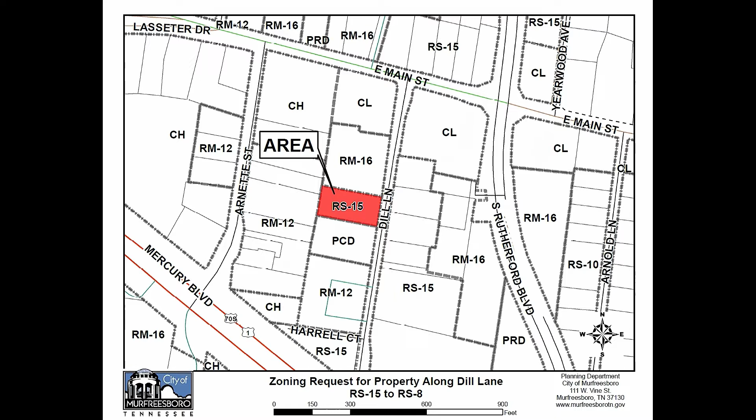The property is just under half an acre, and it is currently zoned RS-15, single-family residential district, with a minimum lot size of 15,000 square feet. Under the current zoning, they cannot create 2 separate lots. That's the impetus for the rezoning request, to go from a 15,000 square foot lot down to an 8,000 square foot lot. That's why their desire is to rezone it from RS-15 to RS-8.

You can see the surrounding zoning in this area. There's several different zoning districts. There's RM-12, which is multifamily residential district with a density of 12 dwelling units per acre. CH is commercial highway district. CL is local commercial district. And RM-16 is similar to RM-12, except it has a higher density. So as you can see, there's several different zoning districts within this area.

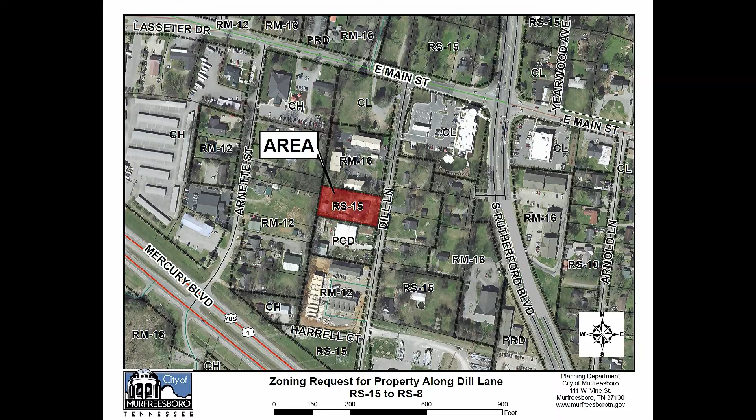Just to the south is a PCD, planned commercial district. The future land use map does recommend that this area develop auto-urban multifamily, and the use is not inconsistent with that future land use map, though the lots are smaller and it is not a multifamily use. But staff is still in support of creating single-family lots in this area instead of multifamily lots, because the lots are so small it would be difficult to do a well-designed multifamily development on a property that's a half acre. If you have any questions, I'll be glad to answer them.

There are representatives of the applicant here this evening. They have provided an exhibit in the packet to show you what the 2 lots might look like. It would be a traditional lot and a flag lot, and each of those lots would be able to meet those standards under the RS-8 zones. There'd be no need for a variance. Some of the information on the exhibit is just for your review, it's not for plat review. In the future, when they want to re-subdivide this property, it will have to come back before you for that approval. If you have any questions, I'll be glad to answer them.

Otherwise, you should conduct a public hearing prior to making your recommendation to City Council. Thank you. Does anybody have any questions for Ms. Green before the public hearing?

We will open the public hearing and ask anybody that would like to come forward to speak either for or against this item to please come forward, state your name and address at the podium, and make all your comments to the Planning Commission, please. Anybody at all? We will close the public hearing and ask if there are any other comments or questions from the Planning Commission.

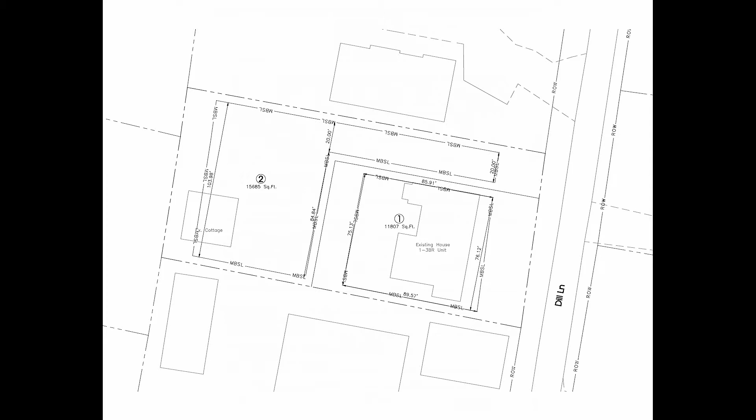The only reason I asked the question was it looks like it's wide enough for two long lots where they both have frontage, but based upon the width of the property, you need 30 feet for the flagpole portion and at least 55 feet for the non-flag lot. So for each flag lot, you would need an additional 30 feet. I don't believe they have enough frontage to be able to get a third lot there.

I especially agree, with the constraints of the existing home. I was just talking about the frontage, just having two lots, any two normal lots. I think the limiting factor is the existing house. You can see the footprint of the existing house. I think their goal is to leave the existing house up front. Okay, yeah, I got it, with the location of the existing house.

Thank you. I had a question too. Is the applicant here? I called you today. I did have a question, interested in talking about the services that Journey Home provides, who will be the clientele you're looking for here, and as we expand, more question for staff. I called somebody today just to ask about whether there have been any challenges on the site related to neighborly complaints about anything related to the site.

No, not since we've been there. If you don't mind, just go ahead and start out by introducing yourself for everybody watching tonight. Sure, I'm Scott Foster, director of the Journey Home. We operate a center at 308 West Castle Street here in town, and also have 25 homes and apartments that we rent to low-income families and individuals throughout the city. We acquired this property in 2014, and we've had three families, the family currently in the front house is our third family in those 6-something years.

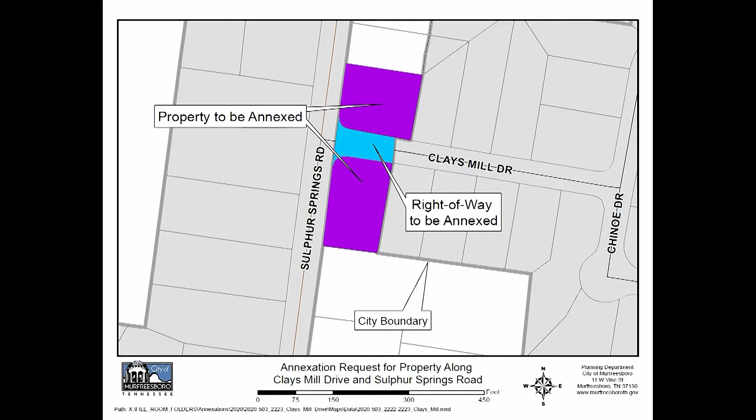So we studied the area. I have presented in your packet a plan of services and a feasibility study. What that does is provide a time frame for when the city can provide services and identifies the services the city can provide. Essentially, we're already providing many services to this area.

It's already receiving sewer and paying an outside-the-city sewer rate. If annexed, the rate would go down to the same rate that we pay for those of us who live in the city and have sewer currently. It currently receives water from CUD and will continue to do so.

These two lots are part of a larger subdivision, most of which is located in the city. These 4 or 5 parcels were left out when the subdivision was created so that we would not create an island of unincorporated area of Rutherford County. It was a way to have this development mostly be in the city, but to comply with the intent of any of our interpretations of the law.

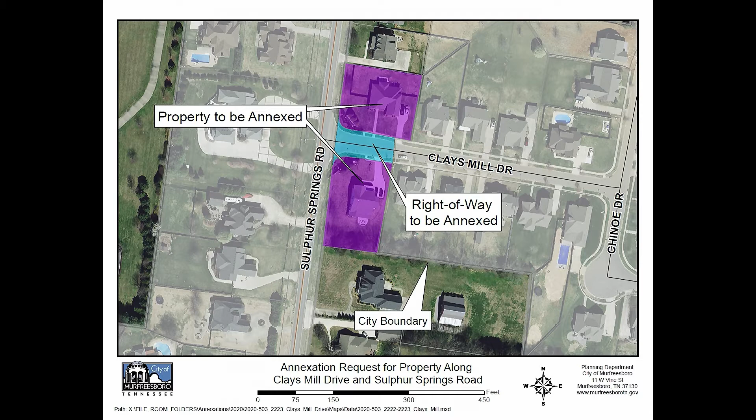Since then, we've had some changes in circumstances and legal opinions, and we believe that we can annex these properties and would be within our ability to do that. After conferring with our legal staff, they're comfortable with this annexation, if that's something the Planning Commission would like to recommend. The properties are contiguous with current city limits.

They are located in the urban growth boundary. The Rutherford County Road Board has considered the 150 feet of Clays Mill Drive that we're requesting to annex as well. All of Clays Mill Drive, except for this 150-foot portion, is already in the city limits, so it made sense that one entity would be responsible for the continued maintenance and operation of that road.

You may recall that Sulphur Springs Road is on our major transportation plan and will be improved in the future. When the developer created these lots, the developer did participate in those improvements by providing fees in lieu of construction to our office, so we do have funds from the developer for future improvements to that road when it does happen, but I thought you might want to be aware of that.

So this would be a relatively easy annexation for us to enact. When we studied this, we thought that just annexing property so they can go to city schools may not be reason enough, but after studying the property and seeing that it really probably would benefit our service providers and it would make sense, our recommendation as staff is that you consider approving this annexation, since they are receiving city services, drive city roads, and are part of a city subdivision, so it made sense to us to bring this to you.

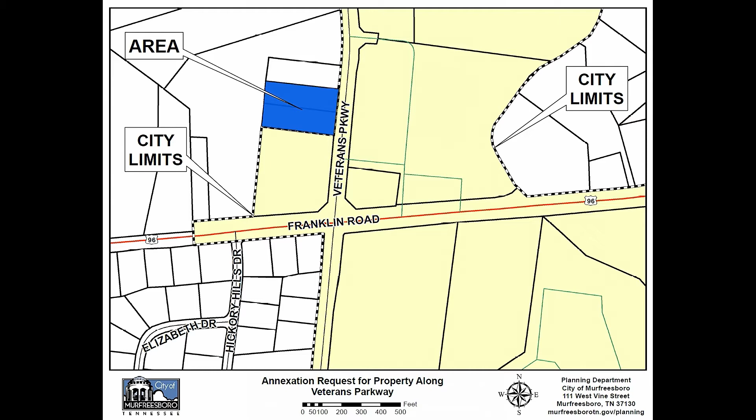As indicated, the subject property is located on the west side of Veterans Parkway, just north of Franklin Road. It does include 2 parcels, each approximately 1 acre in size, for a total annexation area of 2.12 acres. The property owners have filed petitions with the city requesting annexation. They also have submitted a simultaneous application to rezone the property to commercial highway.

This may be a little bit familiar. This was one of the 2 parcels that had come before the Planning Commission in 2019, almost a year to the date, requesting annexation and rezoning. After deliberation and public hearing, there were some comments provided back to the applicant to consider acquiring an additional parcel to make it a more buildable lot, which he has since done.

So the property, he does not own it yet, but it is under contract purchase at this time. The study area is within the urban growth boundary, and it is contiguous to the city limits on the south and to the east. We do have some concerns about these being currently developed with single-family residences that are occupied.

Our assistant city attorney has been in communication with the applicant about how to resolve some of this. We would like to see the parcels combined and those houses demolished before the zoning would take place. They are discussing possibly providing conditions on the annexation with an agreement that would require that to take place. Mr. Ives can describe that a little bit more in detail.

For tonight, the purposes are to open up the public hearing and deliberate, and then make a recommendation to the City Council. I'm here for any questions, as well as the applicant is here this evening, and the applicant's representative, Mr. Clyde Roundtree.

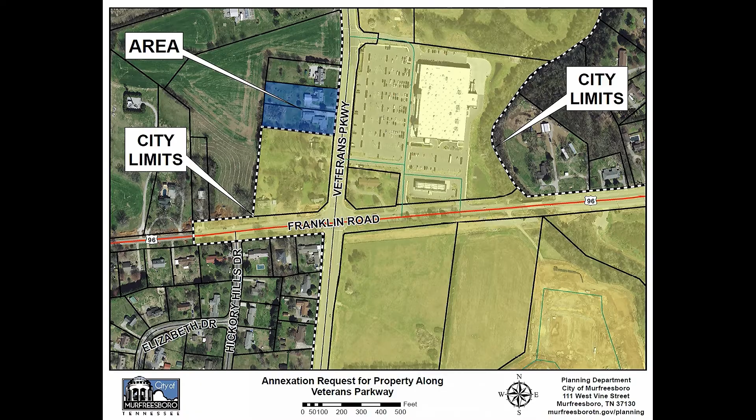Combined into one lot. One thing I would add that was brought up during the 2019 public hearing was regard to cross connectivity between the area shaded in blue and the Veterans Plaza corner. Since that time, the Veterans Plaza developers came back in, submitted revised plans and a revised plat, and now, as part of their approval, we do have the cross connectivity between the lots, so that people would be able to get from this development to Veterans Plaza without having to get back out on Veterans Parkway.

Correct. And I guess one question, presumably now we will only have one curb cut between those two parcels, which once they're united, can we talk about that? I would have to defer to the applicant and his representative. We don't have a site plan proposed for this. I think they've put together some concept drawings that they may be able to address that question.

Turn that over to Clyde. Mr. Roundtree, good evening. Yes, I'm behind this mask. Clyde Roundtree, Huddleston Steel Engineering. Thanks so much for hearing our request for annexation and rezoning.

Mr. Martin, to answer your question, we know we're going to have cross connectivity. Exactly where the driveway is going to show up, it hasn't quite been determined yet, but it more than likely won't split these two lots. What we're running into is one more lot over, which is currently for sale.

There's a stoplight right there. And so how that all lays out ultimately, I have a feeling there'll be cross connectivity against all three lots going to the traffic signal. So more likely between the three lots will be one driveway, whether that splits our property or shares with an adjacent property, that'd be the question mark. So it hadn't been determined yet.

But the goal is to limit the amount of driveways on Veterans, obviously. That's what we're shooting for. Also, several concepts that I've worked on have a lot to do with the back portion of the property too. There's a large acreage behind this piece of property, so we're planning on having some sort of rear connectivity as well that'll go onto Franklin Road.

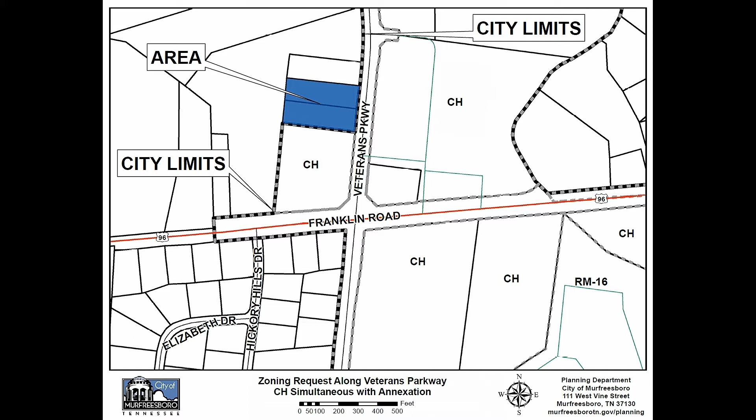Thank you - yes, this is the companion zoning application that accompanies the annexation item we just discussed and acted on. The addresses are 4431 and 4441 Veterans Parkway, located north of Franklin Road. As indicated, these are both currently developed with single-family residences and are no longer occupied - I need to correct that for the record. And as indicated before, they wish to ultimately combine the lots and develop it with commercial use for a liquor store. They've also mentioned a drive-through restaurant at one point to be added to the liquor store.

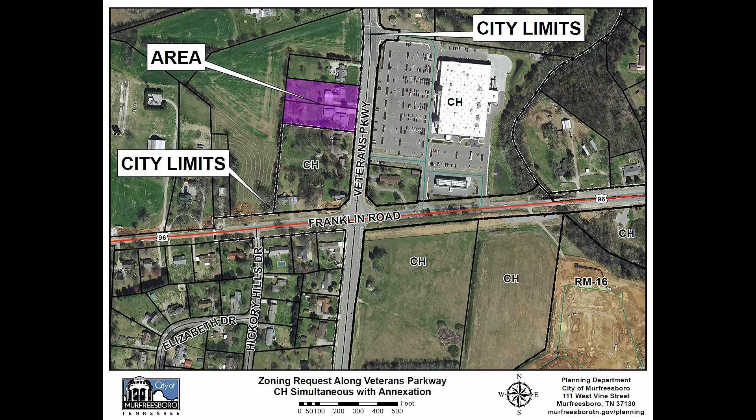The adjacent zoning is commercial services, in the unincorporated portion for one of the parcels. The other parcel to the north, the subject property, is currently zoned RM, medium-density single-family residential. Properties to the south are CH within the city limits, commercial highway. Property to the east is also in the city limits and currently zoned commercial, with the grocery store on the corner. Property to the north is still in the unincorporated portion of Rutherford County and also has single-family homes occupied, zoned RM.

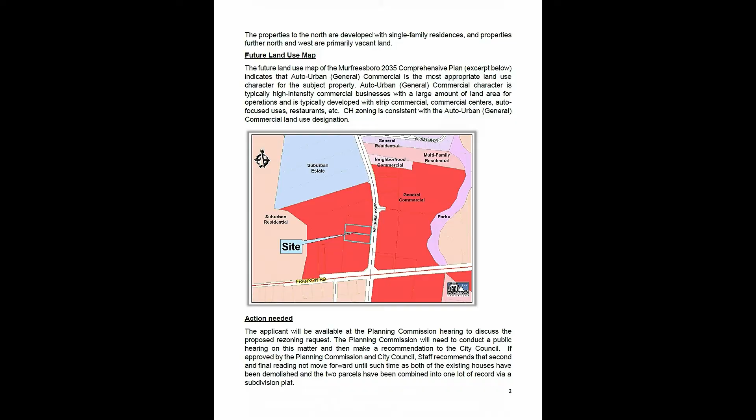The future land use map for this property in the Murfreesboro 2035 Comprehensive Plan identifies general commercial as the appropriate land use. Future zoning of CH is consistent with that land use designation, so there are no inconsistencies. Again, the action we are requesting is that you open a public hearing and then make a recommendation to the City Council.

Thank you, Ms. Rush. Any questions before we open the public hearing?

We'll open this public hearing and ask if anybody would like to come forward to speak. Seeing none, we will close the public hearing.

We'll ask for any other questions or comments from the Planning Commission and/or a motion. Does this motion need to include the same stipulation? Not necessarily. I'll make a motion that we approve subject to staff comments. Second. Motion and a second. All in favor, please state aye. Aye. Any opposed? Okay.

Thank you all. Next, we have a zoning application to amend the PRD zoning, Laurelstone PRD, on approximately 46.5 acres located along Lascassas Pike and Dejarnette Lane. Goodall Homes LLC is the applicant.

Our next public hearing, as you mentioned, is to amend an existing PRD, Planned Residential District zone. This PRD was created in 2017 and is referred to as the Laurelstone PRD, consisting entirely of residential development. You can see the area shaded in red on the map before you. It's a rather large parcel at 46.5 acres, with frontage along and access to Cushing Avenue and Lascassas Pike, and a couple stub streets, or at least one stub street into the property, Oakview Drive.

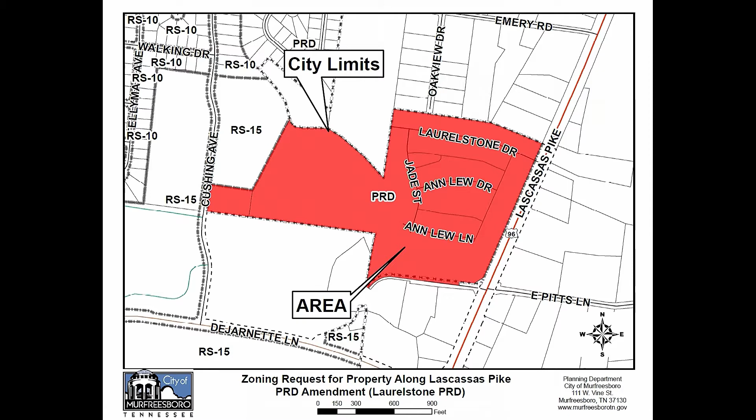The property is mostly surrounded by unincorporated area of Rutherford County. To the south is a church and some large lot subdivisions. Lascassas Pike, of course, has some ex-urban sized lots, so rather large lots.

The 2017 plan included townhomes and zero lot line type development only in the plan. It is 199 dwelling units with two housing styles they called cottages and villas. There were 149 cottage units, basically townhomes, in pods or buildings of 3 units, and the remaining 50 were villa units, the zero lot line homes.

They're requesting that the standards applying to those remain the same. However, after they began developing this property, the applicant, Goodall Homes, decided there was a need for a different type of product, so they're wanting to introduce a third ownership style in this development, proposing to introduce a small lot subdivision, or single-family detached.

The current plan approved in 2017 has 199 dwelling units for a density of 4.28 dwelling units per acre. This amended plan will ultimately reduce that number by just a few, from 199 units to 186 dwelling units, for a density that's just at 4 dwelling units per acre.

So what they're asking, as I mentioned, is to add or introduce a new housing style by adding 31 single-family detached lots, on small lots, most of them along Lascassas Pike, which makes sense because along Lascassas Pike you have a lot of large lot homes, and it makes sense to put the less dense housing style in that area.

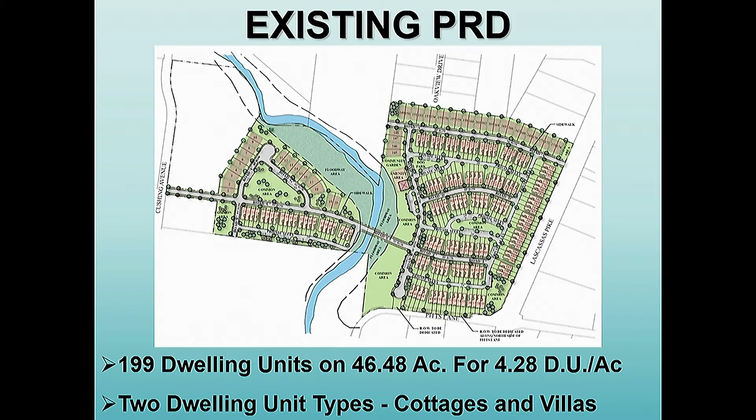We're here tonight requesting an amendment to the PRD, as Margaret Ann talked about, in regards to Laurelstone. You can see the original plan here, we had 2 housing styles, the townhomes and the villas. The villas are the zero lot line front entry garage homes. The cottages, as we call them, were the townhome style with rear access garages off private alleyways on that side. Originally had 199 units for 4.28 units per acre.

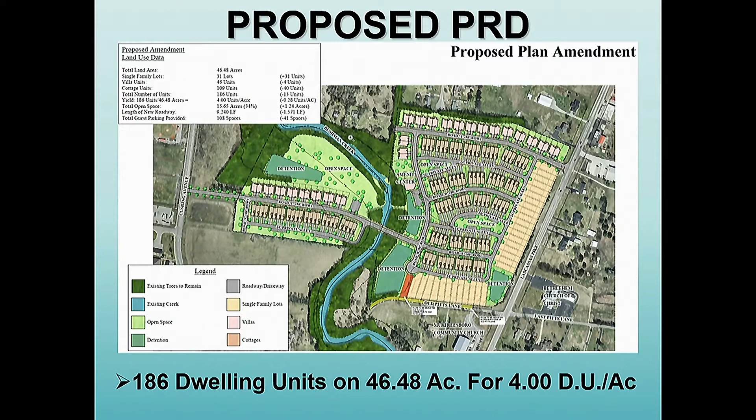The plan that we're bringing forth tonight has a change to that. We're bringing down 13 units overall on our density, so our density comes down to 4 units to the acre. You can see the plan on the eastern side of Bushman Creek is pretty much the same, except for the inclusion of the single-family lots that you can see.

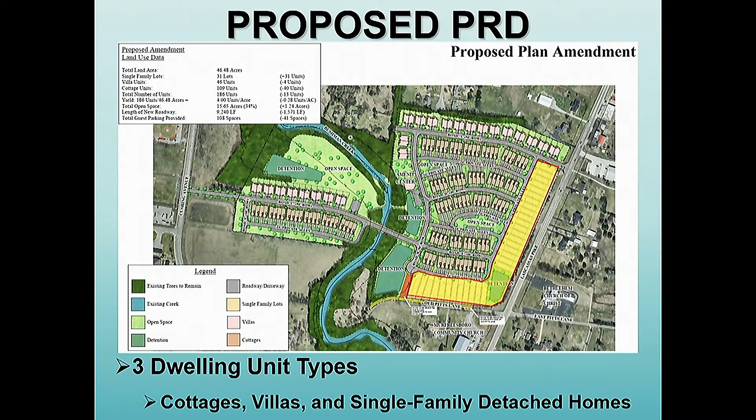So when we're talking about the 3 dwelling styles, again, the cottages are relatively in the same place as the original plan in the core. You had the villas along the external portions and the northern boundaries of the property. And now we've got the inclusion of new single-family detached homes that replace the townhome units that faced out onto Old Pitts Lane and Lascassas on that side. So that's where we're looking for the major change.

Cottages, as we talked about, have very tight front setbacks, and in regards to that, we have a very deep backyard. In regards to the driveways, we have 2 cars in the driveway and 2 cars in the garage to meet our 4-car minimum on that side.

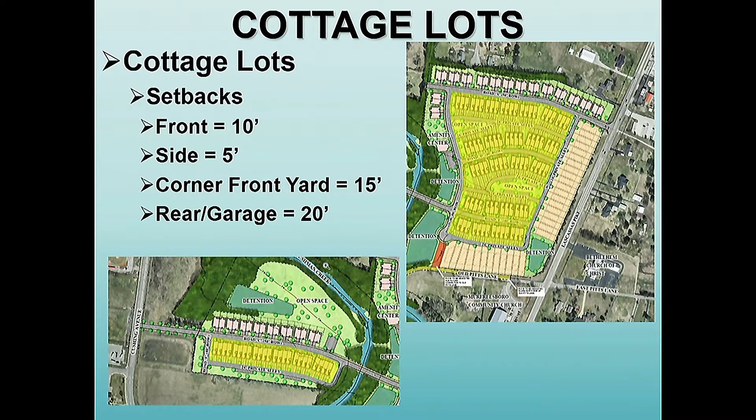Again, we're down to 109 of these age-targeted but not age-restricted homes. The minimum is 1,200 square feet. This is all similar to what we had approved 3.5 years ago on that side, so this is more or less the carryover. And these are what the rear alley garages look like.

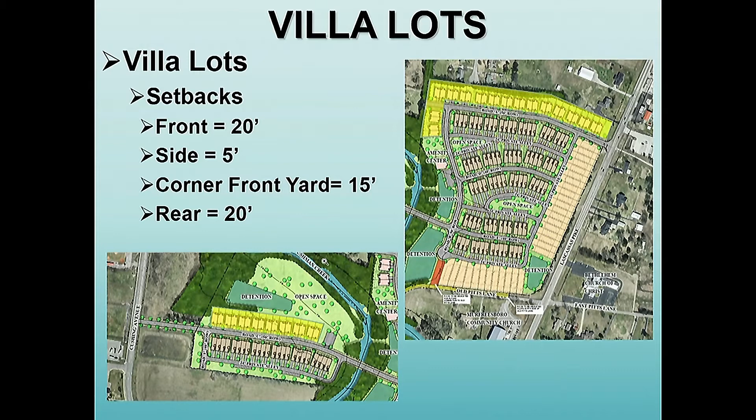The villas are a secondary component that was part of the originally approved plan. These are front entry garages, so you have room for 2 cars in front of the garage and then 2-car garages for each unit on that side.

If you remember these units, these are the elevations on that side. These are age targeted, but not age restricted. Our square footages go up to 1,400 square feet for minimum living area on that side, and like I said, these are all front entry garage.

Going back to the new product line, the single-family detached homes, you can see these have a 40-foot front setback to Old Pitts Lane and Lascassas. This is a carryover from the original PRD on that side, so the new product line in regards to the homes matches the same setbacks we had in regards to the townhomes that were on those properties originally.

So more or less all we're doing is displacing townhome units or multifamily type units with single-family detached homes along here, which, as Margaret Ann talked about, will probably present a lot better in regards to the residential style of homes on those larger lots out in this area. So something different to add to the product mix.

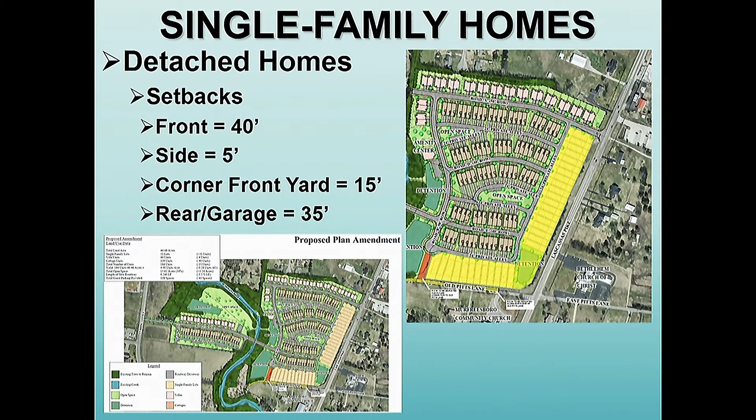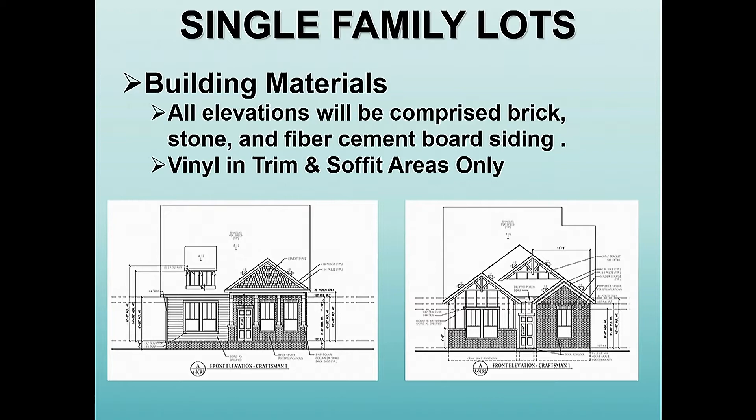You can see some of the elevations in regards to the character of these homes and lots, and some of the other architectural characteristics with regards to the water tables and such with the masonry board on that side, and the side elevations as well.

So Rob, can I ask you a question? Yeah. What's the front of the houses that are going to be on Lascassas? Which way are they facing? Does that make any sense?

The fronts of the homes actually face the road, so these are actually rear-loaded type products on that side. So there are no garages facing out to the main roadways in this. This is all rear alley on that side.

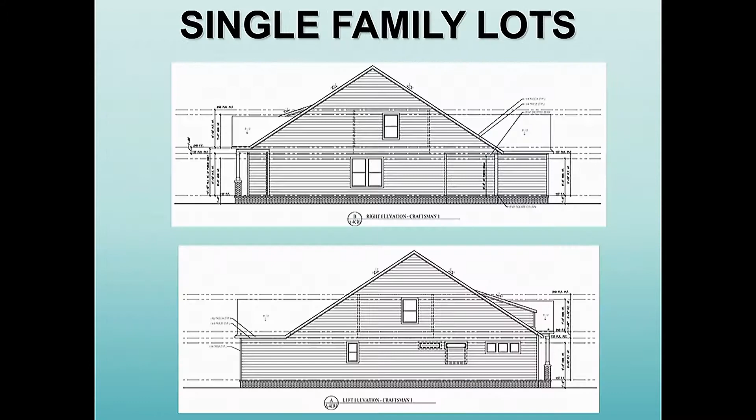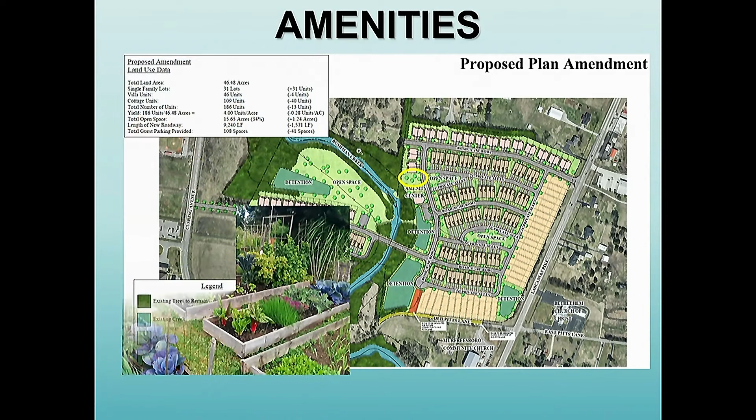Amenities, we've got the main amenity, and this is still the same program as we had with the original plan. The amenity with the clubhouse is the same focal feature. Aside with that, we've got community gardens and a pet park as well on that side.

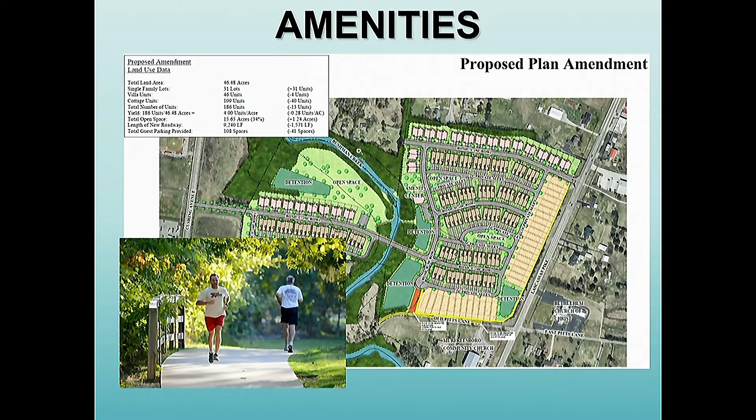Staying with our commitment from the original plan, we were going to install a 6-foot wide pedestrian walkway along the fronts of these lots. Since we don't have sidewalks on Lascassas and Old Pitts, we wanted to incorporate a sidewalk component to the fronts of these homes with our large setbacks, to allow for our residents a walking space that's safe and convenient, but also create a walking or running loop within the development itself, utilizing that frontage along those 2 roadways.

Access: the main access point we have is off of Lascassas. We actually have approved plans through TDOT for our turn lanes that we were committed to during the original approval. We have plans approved for a dedicated left-hand turn lane as you're leaving town to turn into the development, and also a dedicated right-hand turn lane to turn into the development as you're heading into town on Lascassas. Of course, our secondary access point will be off of Cushing Avenue once we get the bridge installed.

We've got two future stub locations that are pretty much in the same location as the original plan from 3.5 years ago, one to the north and one to the south, to allow for access to adjacent properties if those ever develop. We've also continued our commitment to leave right-of-way dedication for a future possible connection back to Old Pitts Lane, if the city ever needs to make that connection. So that's still part of our commitments today.

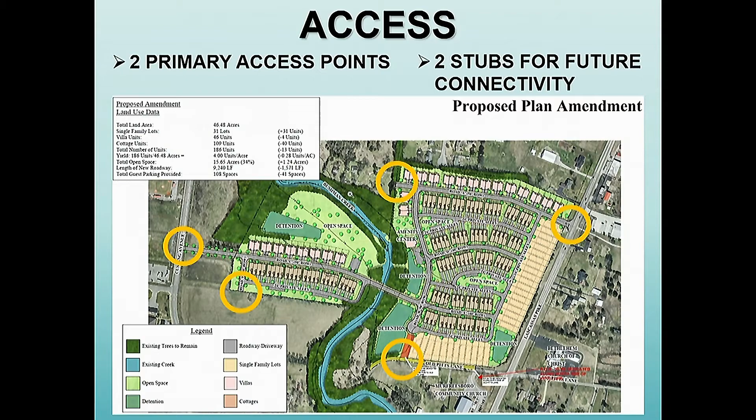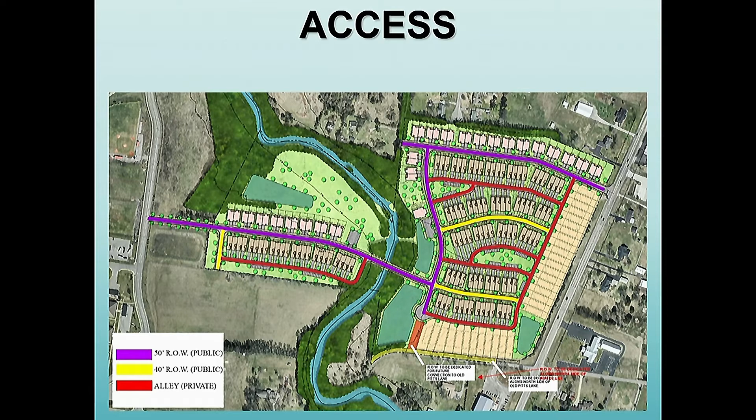As for access on our roadways, the purple is our 50-foot public right-of-way, the main thoroughfare through the development connecting Cushing Avenue back out to Lascassas. The yellow is the 40-foot local roadways for the streets on that side, and the red are the alleyways for all the alley garages in the development.

I appreciate your time and consideration. If you have any questions for me now, I'm here. If not, you can ask after the public hearing.

Can you remind me, our main access road off of Lascassas, will that be the initial only way in and out of this subdivision until phase 2 is done? How many homes will we have in that first area? Do we have a light at that intersection, or does that justify one?

As of right now, based on discussions we had at TDOT getting our plans approved, there's no light plan for that intersection. I don't think it warrants it given the amount of traffic on Lascassas. I don't know the specifics of what the engineering department worked out with TDOT, since that's a state roadway, but as far as I know, it's not warranted for a traffic light.

Regarding the amount of homes coming out that entrance until the bridge is built, phase 1 has a cap the city requested—about 50% of the overall density is in phase 1, which would come out that entrance until the bridge is made for the connection back to Cushing. It's the same commitment we had 3.5 years ago; we're just still honoring that.

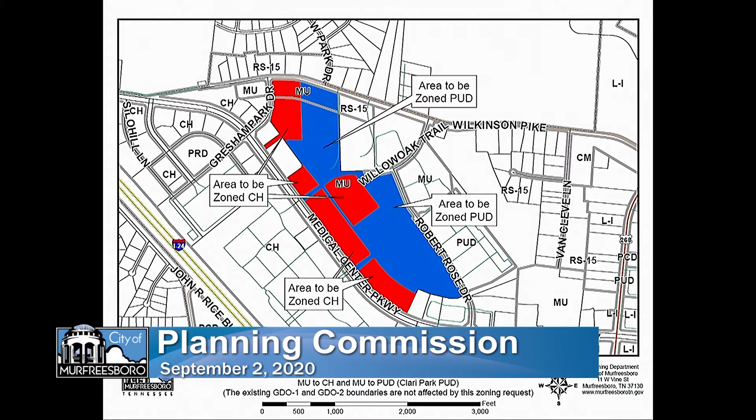As I mentioned, it would remain in the Gateway Design Overlay District. By being a bulk zone of CH, the plan development doesn't need to be very specific about the development of those parcels. I think part of their concern was they could do a plan, but things would likely change and they'd need to come back for an amendment. So given the option, they changed their application to CH, Commercial Highway District.

You can see it consists of several of those areas identified in the pattern book. On August 19th, we brought it back to you and asked you to amend when you scheduled for a public hearing, to include the CH portion. So that's what is on the table tonight.

As far as the plan, even though there are two different zoning districts, it's really important to staff that it be managed and maintained with an overall responsible entity, and that it maintains the standards. Across the street, the Avenues is not a planned development, but they have very strong covenants and an architect on board that reviews all developments and tenant build-outs, with a strong management regime. So we've asked them to come up with a plan for this, because we fully expect that portions of this will be sold off and won't all remain under the ownership of the applicant, who is Hines Development tonight.

So when you do sell property, I want to make sure the intentions are communicated and those off-site improvements are included. Some elements of the CH property are included in the plan development book, addressing the streetscapes along Medical Center Parkway and some roadway extensions. So it does speak to the CH portion, and I expect, before City Council's second reading if this gets there, any needed restrictive covenants can be adopted.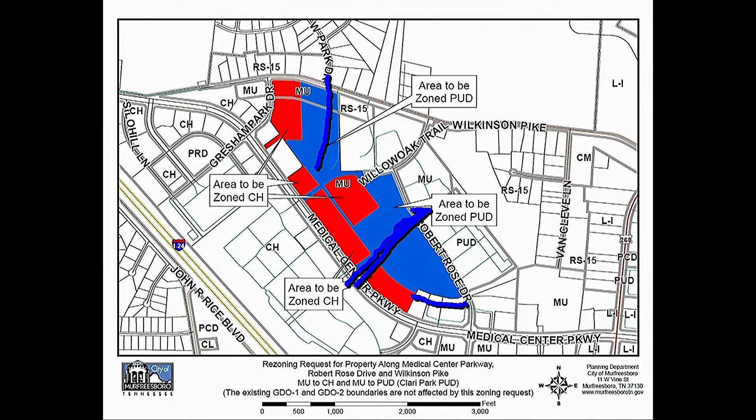I never know how to undo these. Matthew always helps me. I'll just leave them up there. Bottom left-hand corner, it says undo. There we go. Okay.

So as far as the townhomes, I guess I can bring up some exhibits. I did include some communication from the applicants saying what has changed, because it's been an iterative process with so much back and forth, and I'd like to document what's being changed and have something to reference.

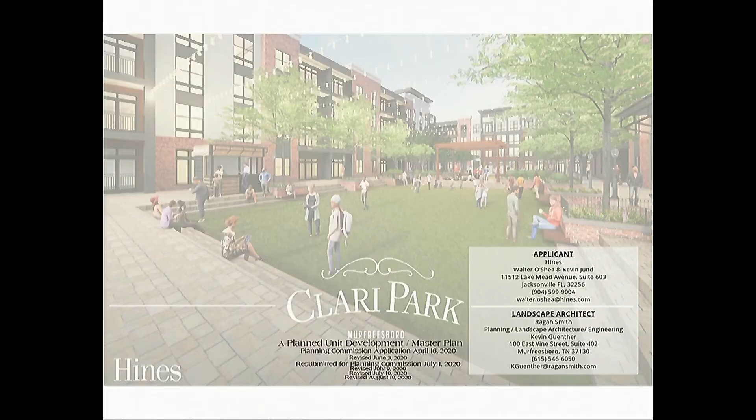So what I'm providing comments on are the version of plans that were provided to us to include in the packet tonight. I know they've sent some emails today and last night wanting to make some further changes, and we can talk about that later, but really the comments relate to the plans we have available to us and the ones you have on your iPads.

I did want to mention we were concerned about the timing of some of the road connections. We really wanted to see Willow Oak tie-in sooner than what was shown in the previous plans. They have a sheet in their pattern book - sheet 26, which gives specifics as to project timing. To their point, they wanted to have some time to build the infrastructure and have some cash flow to complete the work.

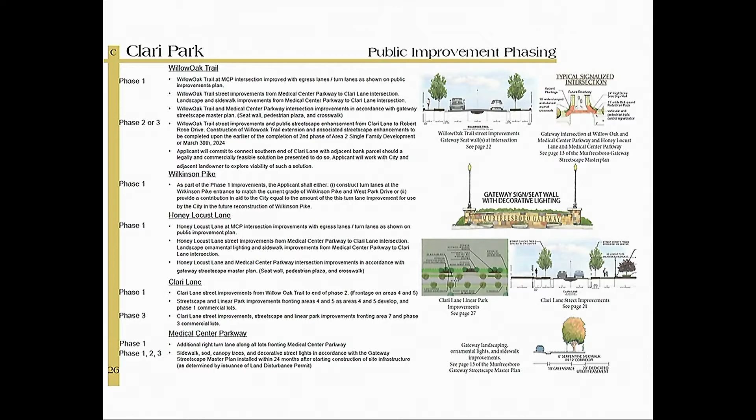So I was asking for Willow Oak to be completed in an earlier phase. They've broken out some of the development so it will start earlier than previously proposed, but it probably won't be finished until later. So I do want you to pay attention to sheet 26, which specifies the public improvements phasing, something we talked about in previous versions of the plan.

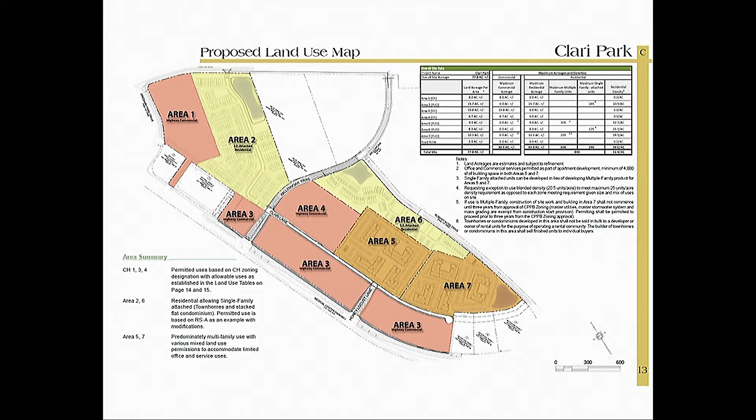So there's a land use map that gives the acreage and the number of dwelling units for each acreage and the anticipated build-out. As I mentioned, the townhomes were the portion that I had the most concerns with.

In the Gateway, of course, it's an area we're really proud of, a city that has continually invested in it. It's something we envisioned years ago and are proud of how it turns out. So when we review developments in this area, we expect more than you might see on the other side of the interstate or on one of our major arterials, but it needs to be different. It needs to be special. It needs to be more than just temporary housing - not temporary as in homeless, but just a place for people to live for a while until they can really live somewhere they want to.

So when I've been reviewing this application, there's a higher standard that applies here than I might apply to some other areas, because of the investment we have in this area and our expectations for it. And so there are some elements of this plan that I mentioned have changed, but were big concerns of staff.

One was that the plan created a lot of dead-end drives or roads. This version shows some hammerheads where you could turn around, but they're not interconnected. We're constantly asking the Planning Commission, even in the face of people who may not want it, to provide interconnectivity between developments and within developments. So we were concerned that they were creating so many dead-end streets that are basically traps. We didn't want service providers to have to back out, and we didn't want people who live there to have to back out of these developments.

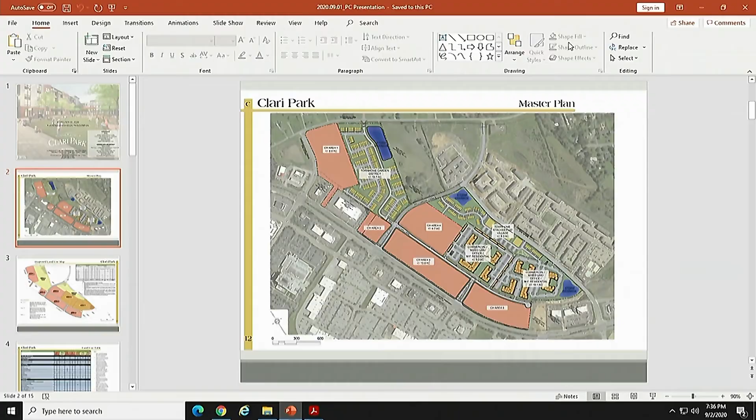The next page I want to reference is page 13. You'll see what we have here is the land use areas. Once again, this map has not changed as far as acreages or road networks or things previously proposed from what you saw before. What has changed is that we have designated those orange areas as commercial highway, and we still have 3 distinct types of use, mixed uses going on with our land use areas. And the densities that were proposed as we last were before you have not changed. The overall unit counts proposed, multifamily and single family attached, have not changed since we saw you last.

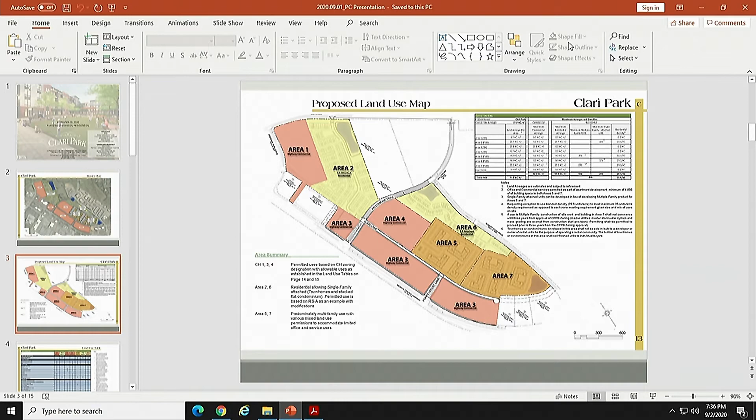So the next 2 pages I'm referencing are pages 14 and 15. The reason I want to reference these pages goes back to what is permitted on all these different areas, 1 through 7. I believe we've come to a point that we've gone through each and every one of those uses with staff, and we're in agreement, and I believe they're in agreement. These are the types of uses that work in the gateway. We wanted to eliminate anything that was not a use that might be permitted, say, in a commercial highway district, but not work in our master plan.

So we've carefully crafted this list with feedback from the staff, and we have made all the revisions they requested us to make on those land uses. We think that's very important because, as Margaret Ann had mentioned, this is not just a typical commercial highway property.

The next page I'd like to reference is page 17, and this is the requested exceptions that we made on the project. Really, the only reason I want to highlight this page is, once again, to go back to the understanding that these exceptions have been reviewed with staff. We believe they're comfortable with these exceptions, and we want to make it clear that we are not asking for a different approach to the percentage of multifamily. What we are asking for is a change from part of the master plan from PUD to CH zone, but the overall acreages, the overall exceptions and land uses have not changed. We'd be glad to review any specifics of those land uses with staff or planning commission.

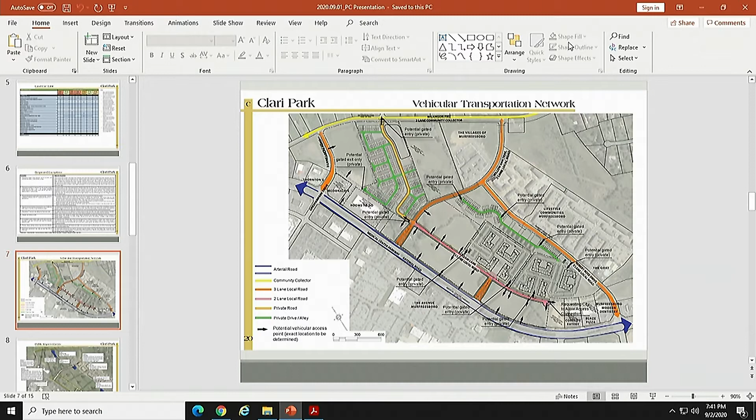The next page I'll reference is page 26 in your booklet. Once again, we want to make clear that we've provided a very specific phasing sequence for all the public improvements related to this project, and staff has agreed that this sequence makes sense and gives the city what's needed as far as the phasing we show.

One thing mentioned was the importance of Clari Lane. In the center of the project, Clari Lane is extended over to the far right lower part of your page, which would be the southeast corner of the project. Margaret Ann mentioned a connection from that point over to Robert Rose Drive. We are in full agreement with allowing that connection to happen, and we've provided the connection point needed from our property. We've also provided a turnaround cul-de-sac in case that connection doesn't happen.

I want to make it clear that we are all for the connection. We would love to see it happen, and we've given all the tools we can on our property to make it possible. But as far as the rest of that connection, that would have to be worked out between the adjoining property owner and the city. So we've tried to provide the proper geometry and connection points for either scenario. We would love to see the connection happen, but if it can't, we understand there needs to be a proper turnaround designed to meet city standards. We're going to provide both of those options.

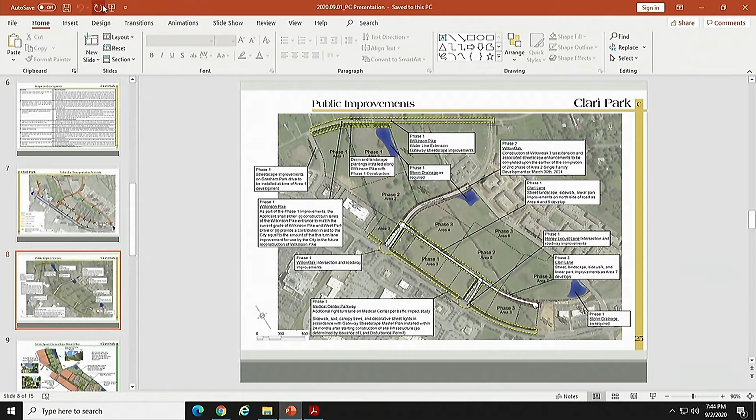Go ahead and put this in presentation mode. Oh, we lost it all.

There we go. Wes McGill with Reagan Smith, the civil engineer representing the project. Like Kevin mentioned, we did hear some concerns from the adjoining property owners about some existing drainage problems along Wilkinson Pike, and we want to walk through with the Planning Commission our plans to address those.

On-site, what we can do is provide stormwater ponds, retention ponds, or detention ponds to manage our on-site stormwater, making sure our runoff rate is less than what it is today currently. So we're going to manage that on our site. And the construction of the landscape buffer berm along Wilkinson Pike will also help manage that water and hold it on our site.

We'll release this pond into the roadside ditch that goes down Wilkinson Pike.

We did learn by reviewing the 2010 flood aerials that they were great at showing what the issues are during larger storm events, and the overall basin in this area culminates down to a low point. It's in the Hale property adjacent to Clari Park, and in its existing condition that gets dammed up and wouldn't allow water to escape. So essentially all that water, the only route for it to go is to cross Wilkinson Pike and then over into the Manson Retreat subdivision.

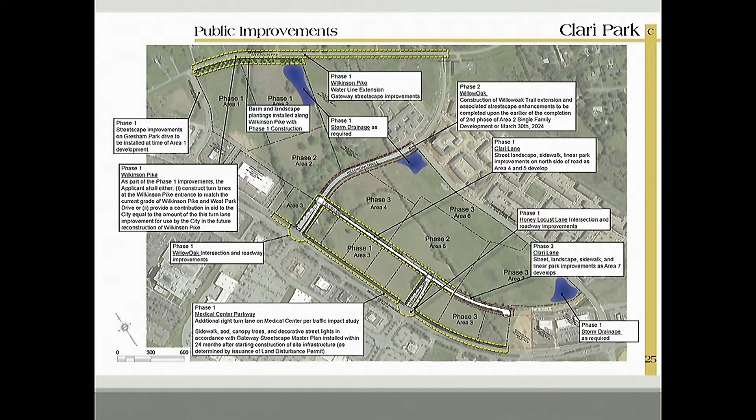If you have any questions about stormwater, I'd be happy to answer them. If not, I can turn it back over to Mr. Gunther. Any questions on stormwater? Okay, alright, thank you. Thank you very much, appreciate it, Mr. McGill.

Thank you, Wes. And I think one of the things we're just trying to really point out is that we realize this project impacts the surrounding area. Wilkinson Pike is part of this project, we realize that. Hines Development has said we want to help the city improve not just what's happening on our property, but what's happening with the storm drainage that we heard was a concern from those adjoining residents. We'll continue to work with staff, we'll continue to make sure whatever's designed is appropriate. But that is an idea that the Hines Development team wanted to come up with and present to you tonight as something we realize is important.

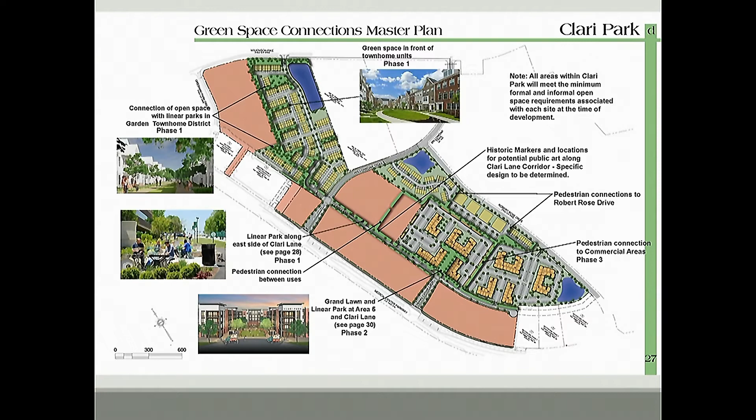Alright, the next page we'll take a look at is page 35, and I think it's worth spending a little bit of time on this.

As Margaret Ann had mentioned, we have made revisions to the site plan included in this current document, but this was our starting point. I want to point out the things we've done in response to staff, because we think their comments were important and valid, and we have continued to craft this, even since Friday when we received those comments.

So what you see is that we've reoriented a lot of these units along that main driveway, the main drive that comes through the project. That's something we recognize is going to make a big difference in the way it feels as you're coming down the primary street.

So we've accommodated that, and in places where you cannot have the front facing the street, that is where, as Ms. Green mentioned, we are working on very specific details of a wraparound porch. That would be relative to these units facing along the drive, the units facing the perimeter of the site adjacent to other properties, and units where that side of the building faces our primary street. We've recognized those side elevations have to be something special.

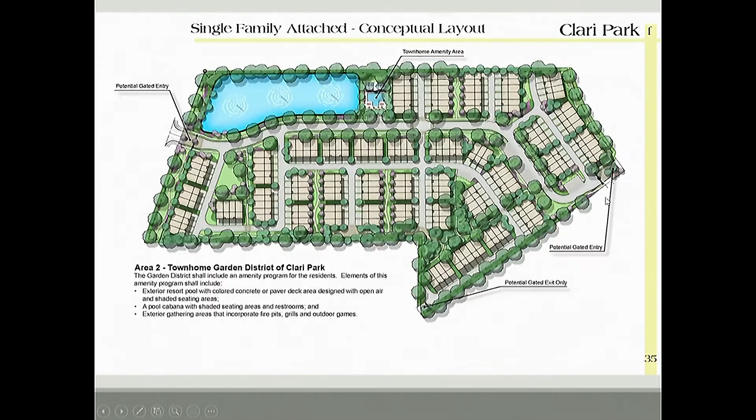We know that's an important thing, so that's something else we've agreed to. As you see on this page, the far left image in the middle depicts part of what we see for that wraparound porch and how that starts to treat the edge of the house as something different than just a side elevation.

The middle elevation is a good example of what the rears of these buildings would look like, and you can see there again, we don't feel like just because it's in the rear, it's devoid of detail. It still has a high level of detail, still provides some personal scale to that building. We really think that this is going to be a top-notch product and a top-notch architectural style, something that'll bring really a new level to single-family attached, not only to the Gateway but to the city of Murfreesboro.

The other thing we've done is, as you see, there's the Southern traditional, the farmhouse, the craftsman styles. They're unified in some of their materials and how they feel and the scale, but we want variety, we want interest as well as unity. So we're working hard at making sure that you're not going to have a row of the same type of architectural styles. There'll be some variations and there'll be some interest and nuance along with the unity.

So I know this has been something that's important. I'm happy to pause here if there are specific questions. In your pattern books, you will see some enlargements. If you go to pages 39 through 41, we show the same images but just at a larger scale, so it might be a little bit easier for you to read. But on page 37 here, we summarized all of those elevations onto one page, so you can compare the different styles.

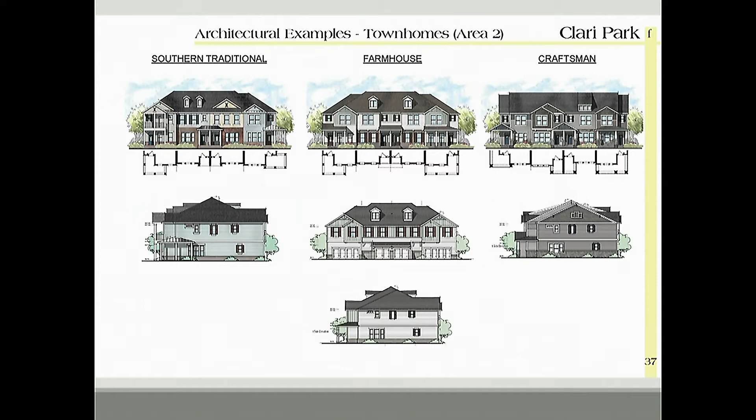So, two questions. Yes, Mr. Halpern. I just want to make sure I understand. On page 38, it outlines what is going to be considered enhanced side with wrap porch and enhanced side elevation. So these are the units that you are—is this being amended also, or? Yes, sir. That image is also being amended because this is based on our old site plan.

So we provided Ms. Green and city staff with a revision to this that communicates directly to the new site plan we have. And there's no reflection—please correct me if I'm wrong—there's no reflection of the wraparound porches that you are speaking of that I see in this?

In the pattern book, a good example, if you go to page 40, you see that Southern traditional style home, and the image on the bottom of that page shows where that wraparound porch is detailed around the corner of the home. That would be an example. If you look at that same page, the top elevation, you'll see how that wraparound porch from the front elevation fits in and then extends past the side elevation of the house.

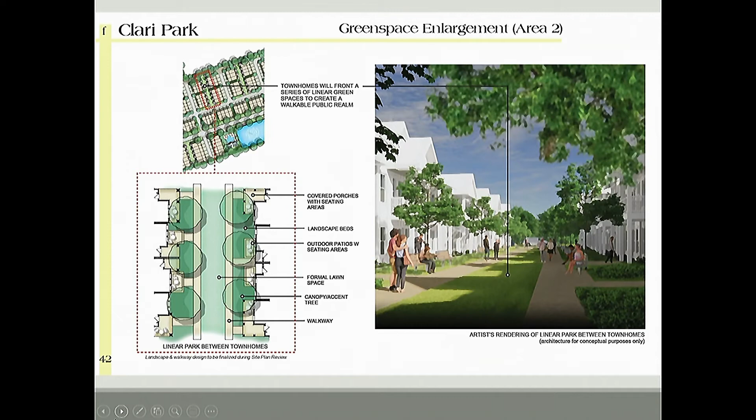Next page I'll refer to is page 42. This really hasn't changed since the last time we were before you. We just think it's really important to show how no matter what kind of layout we have in area 2, we're still committed to the mews, or the common greens between the front of the units, and how that still fits within our current site plan. This illustrative is showing how that space would feel.

So we just wanted to commit that that hasn't gone away with the change in our site layout. Same thing for page 43. With the site layout change, we wanted to demonstrate that we're looking very hard at where the parking fits, where the sidewalks fit, everything to the HVAC locations. Where you see the little box into the units is actually where the HVAC unit is worked into the recess of the facade, so some of those are very well hidden. We've been working very closely with the requirements we know we're going to need for electrical, storm drainage, and all the other utility connections, just to make sure that it fits. We want to make sure it can be built, and we're committed to doing that.

So Kevin, back to page 42. Yes. And Margaret Ann, is this where you were talking about the fact that there's no front porches and no place for people to hang out, because in the back it's garages and all that kind of stuff?

That's right. I think probably page 43 shows a little bit more what the backs are, and that really is just alley, parking spaces, and utility structures. And so the area in between becomes their extension of livable space.

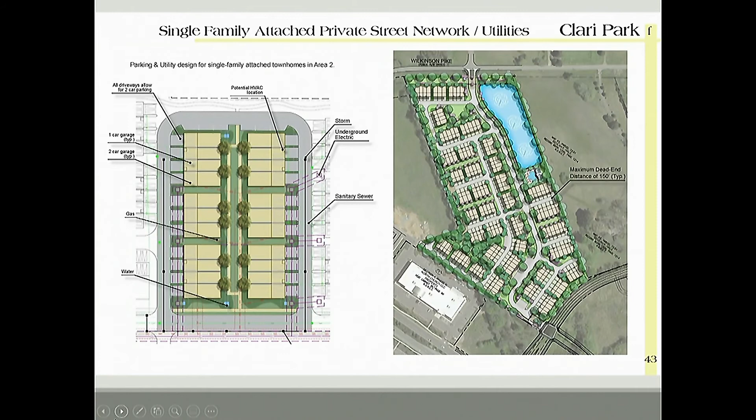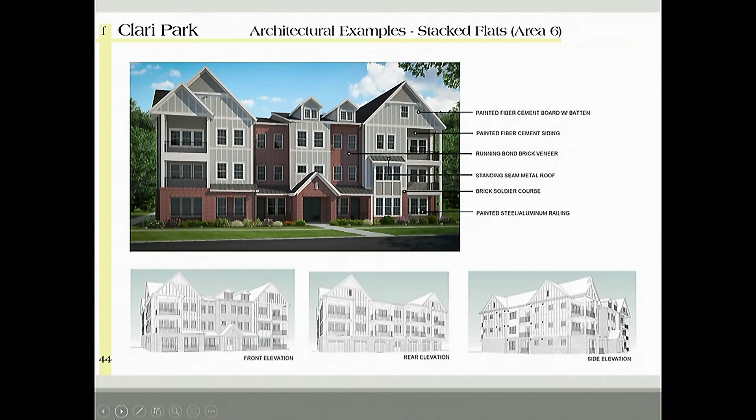The last couple pages I'll refer to are page 44, for Area 6, the stacked flats. I'm highlighting this to show that with our revised changes to the master plan regarding commercial and other things, this has not changed. It's the same as in your previous book and the same architecture we've committed to in the past. Likewise, on pages 46 and 47, relating to the multifamily, the architecture and amenities have not changed from the previous pattern book, and we feel it's important to commit to the design we're showing for the multifamily.

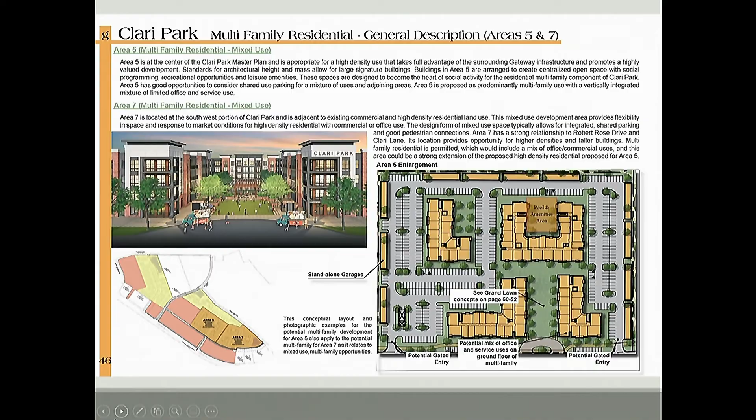I appreciate the opportunity to walk through all this with you. I know it's a lot, but as we said, this is very important, and we want to make sure to answer all your questions. We'd hope that after the public hearing, if there are additional questions, we're available for those as well.

So I have one for you. I think I heard, maybe in Margaret Ann's presentation, that the multifamily might have commercial at the bottom. Is that a correct statement or no?

That is correct. If you look at page 50 in your pattern book, you will see where that occurs on the site plan. The idea, as we mentioned, is that Clari Lane is really this place of commerce and open space and activity. We recognize that fronting the office towards that portion of the site as you first come in would be a very appropriate place to do it. So those two corners of the buildings in Area 5 are committed to a minimum of 4,000 square feet of commercial office, and there's an image showing how that would work into the architecture, how they could fit at street level.

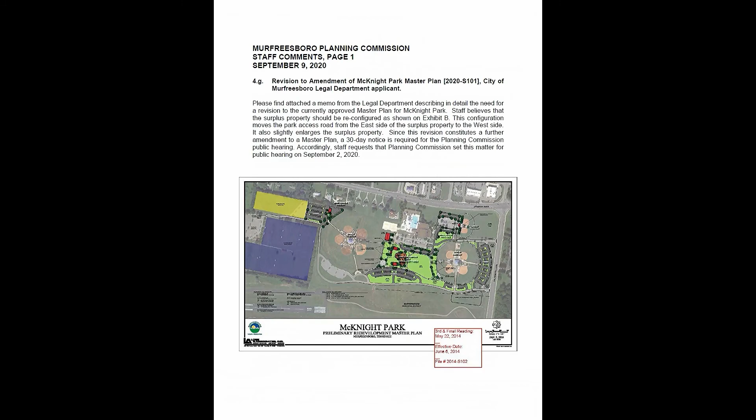Several years ago, we had an amendment to the McKnight Park Master Plan. That amendment is on the screen now. This area here in yellow, approximately 6 acres, was declared surplus property. The intent at the time was that it would be sold to a developer for development. Since that time, a number of things have happened. One of the expectations at that time was that right here, a maintenance facility for McKnight Park would be constructed about there. This amount of parking here would stay roughly as it was.

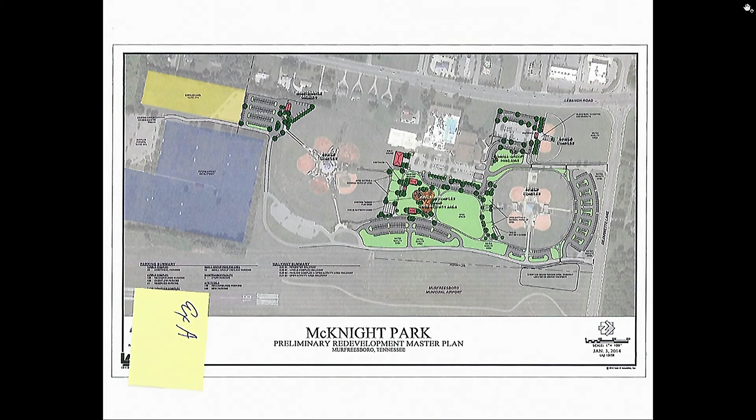Now if I can escape out of this. I don't see an escape button coming up. Oh, that escaped. All right, then. Okay, if we can have the screen come up on that now.

Okay, this is an overhead of the current airport area and a portion of McKnight Park. The area that we're talking about is not outlined here, but it's roughly this area right here, if you can follow the cursor. When the area was originally declared surplus and the master plan was amended, it was expected that this road would continue, and this road where I am now is still there. It was expected that road would continue as it is today, down this area, come along through here, through another parking lot, into the airport, and then be able to exit on Airport Road. That would be a back access for emergency vehicles. It would also be an exit when there's a large crowd and the crowd is trying to disperse. Some of the people could go that way. That's the way the road is today, and it was expected that would continue that way.

Two big things have happened since then. Well, actually three. One is TDK has built this hangar over here at the north end of the airport area. That has changed the dynamic of the development of the airport, and we've now got more commercial operators looking at hangars up in this general area that's still vacant. The second thing that happened is that instead of building the maintenance facility over in this area, the maintenance facility was built here where it is today. And the third thing is that as the development occurred along Memorial, those businesses and developers wanted a back access. And so they were willing to build. It's not dedicated open as a public street at this point, but they have built this driveway to this point. That is on park land, and we intend that to stay park land. What we intend to do is continue this road to the north up here, and then it will connect these future businesses as they develop along Memorial, and it will be a gated entrance into the park.

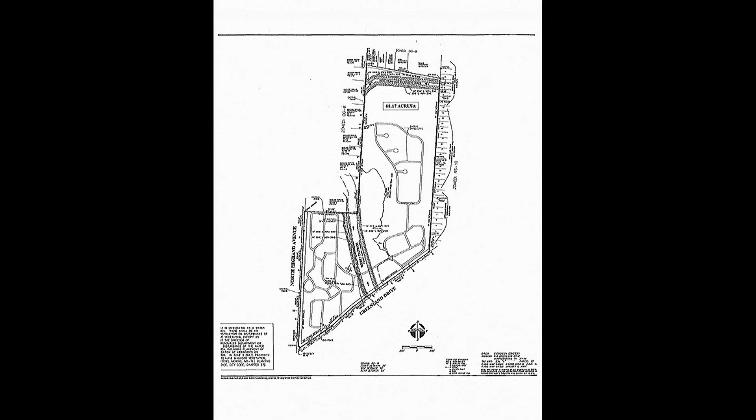Be happy to try to answer any questions. I would tell you that I have not been personally involved in the negotiations for the terms of the transfer and how all that will work out. Others have done that, but I was asked to handle this part of it, and I did obtain a new survey of the property from Huddleston Steel here recently, so that we know exactly what there is. And by the way, there are at least two.

The transfer, of course, would be subject to any and all easements, anything of record, and anything that's actually there. There are two sewer lines, one that follows the creek across that property, and then there's another line that's down at the corner of the property that's not in a recorded easement, but we would retain the easements for those sewer lines. Be happy to try to answer any questions.

And so you will just be looking to us tonight for an approval of the disposition of the property? I'm asking that you recommend approval of the transfer of the property by the city to the nonprofit corporation.

Questions? If there are none, I'll make a motion to approve the transfer, or the recommendation to the city council. Second. And subject, as you said, to any and all. Subject to all of your comments? Yes. Okay, subject to all staff comments.